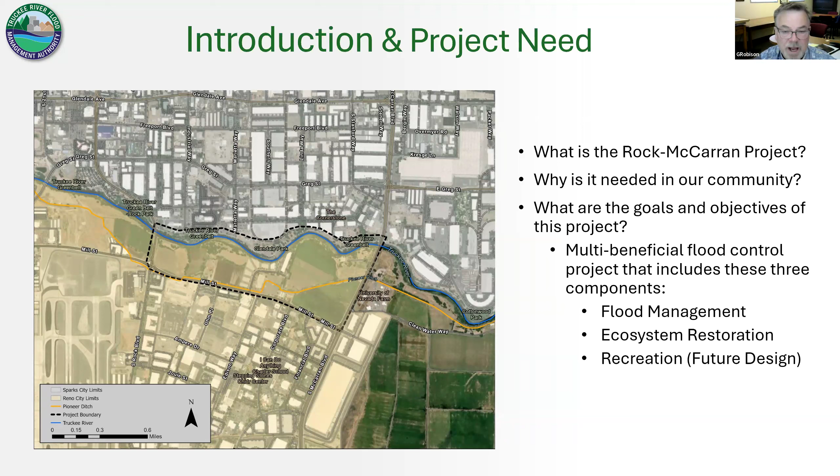So the goals of this project, along with the greater Truckee Meadows flood project, are flood management, ecosystem restoration, and recreation. In the case of the Rock-McCarran project, recreation is in a future design and it's actually being worked on right now. But today we're really going to focus on the flood management and ecosystem aspects of this project. Next slide, please.

So the benefits of the actual Rock-McCarran part of this project: there is a river realignment to put it in a more natural state. It is right now a very constrained, trained river. It has incised banks. You can see riprap in the picture in the foreground on the lower right side. So this is a very trained river. You want to let it have more ability to move around a bit in its meander belt.

We're also putting up levees on each side to protect these industrial areas and the airport. We're putting up terracing to create a more natural floodplain, low terraces and high terraces. And we're trying to increase flood storage and capacity near the river, but we're going to end the flood storage in the industrial areas. So water doesn't go into an industrial area, get all polluted, come back in the river and go down to our desert terminal lake, Pyramid Lake. So we're trying to do all these types of things in this project.

For the environmental restoration, by allowing the river to spread out more and managing the high velocities, we can reduce bank erosion, add secondary channels, which create more fish habitat, and construct pools and riffles that develop more diversity in fish habitat. And along the river, we reconnect the river to the floodplain, which affects the vegetative expression, wildlife habitat, and those sorts of things.

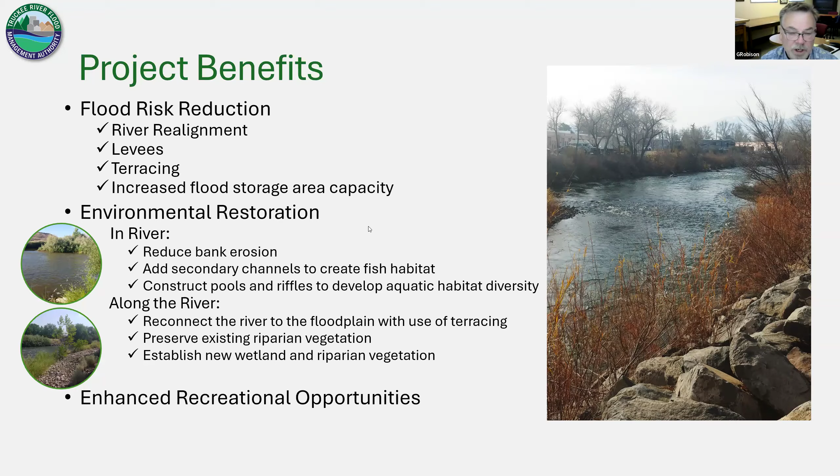He has a team working on this of roughly 35 people, geomorphologists, engineers, biologists, recreation experts, and planners, etc. So we'll take that from here and let him move with that. And you can just take it over from here, Shane. Great. Thanks, George, for that introduction.

We looked lightly at the recreation, although it's lagging a little bit behind because we're working on getting the flood first. The flood worked out first, and then the recreation will come. And then some additional considerations like costs and private property. So it really represents a significant amount of work with a lot of different teams, lots of different model runs on the hydraulic model, a lot of information that we pulled out of it.

And we presented 8 alternatives in the alternative study, and all of them were successful alternatives. And we ranked those, and then we got input from the TRFMA technical advisory committee, and we also had a public meeting. There were a few that scored the highest, but the recommendation was not one single alternative. The recommendation was take the best from a few of these alternatives and do another iteration. And so that's what we did here.

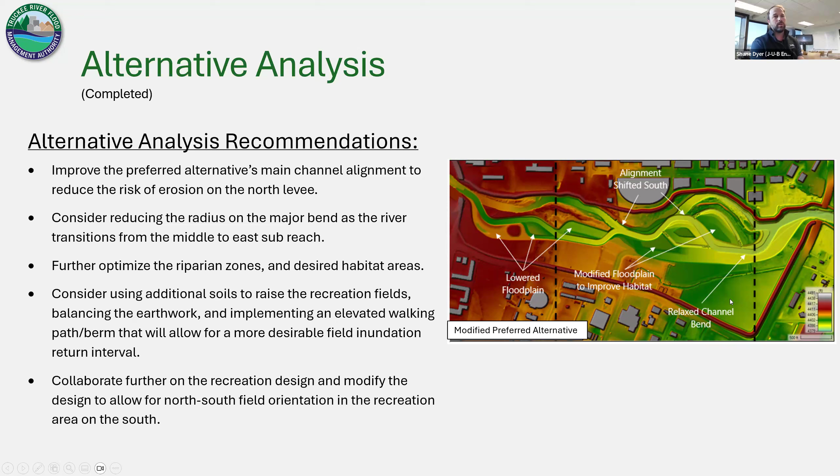And then we popped out with this alternative that we're going to go into really deeply today, right here. And so just to touch on what George talked about, why are we making the change? Well, the green here is what floods without the project, and the blue is what happens with the project. So that's a pretty telling slide, right? We're talking about billions of dollars of damage without the project.

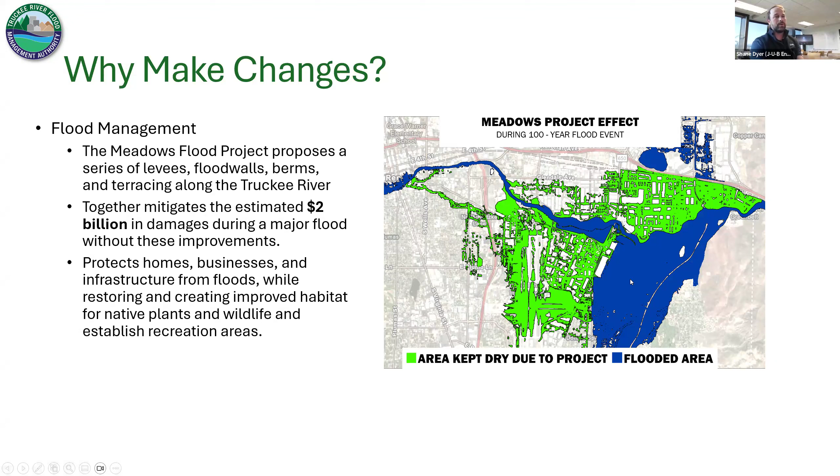So why are we moving the river? The current river configuration, the health of it is very poor. It's incised, it has all those man-made constraints, just like George was talking about. Here's an interesting historical image from the 30s, and you can see overbank flooding, connection of the river with the overbank and flood zone.

We overlaid some of it here to see what it looked like and what it looks like now. And from the very start of the flood project, there was a goal from the working group and the flood project community coalition that we were going to restore this natural system.

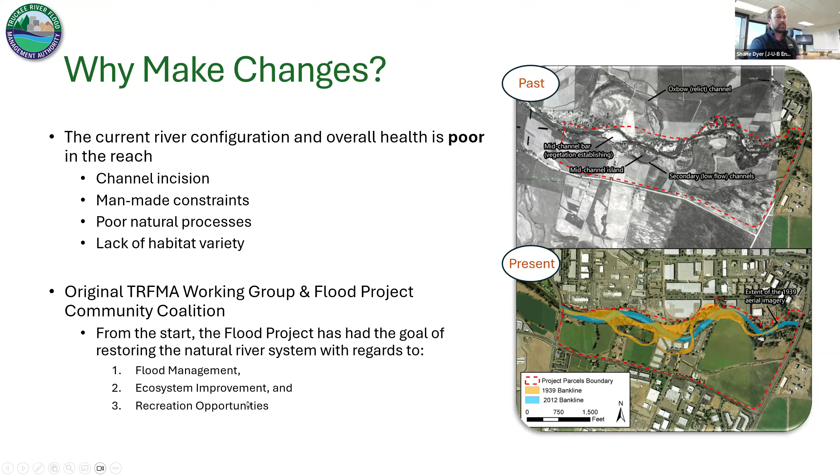And in order to restore the natural system, we have to look at the river holistically, really in regards to the flood management, the ecosystem, and then recreation opportunities. So just a couple of these things to kind of describe them.

So this is an incised channel, right? So when it floods, it's right in here. When it's flowing, there's no connection to the overbank. And this is the area we're talking about when we say overbank connection. And then the lack of habitat and biodiversity. We had extensive studies on the river that went through all the different riffle pools and runs and chutes, and there's a lack of habitat the way that it's been confined.

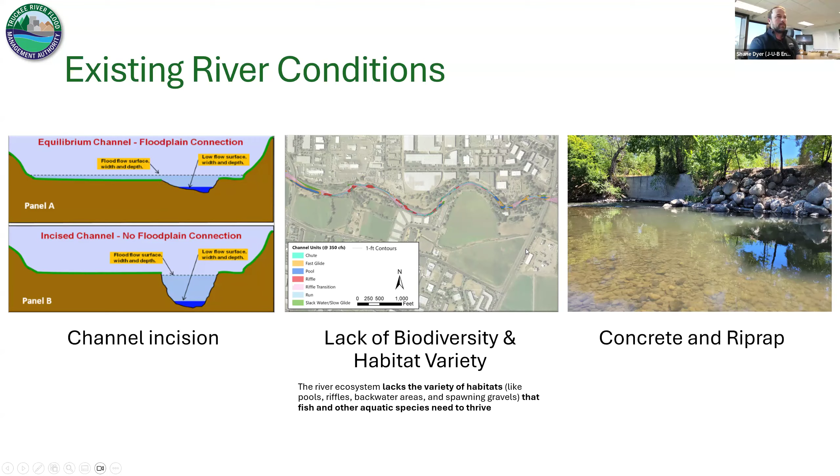And you can see here's a picture of the river in this section. You just have this random concrete wall and big rocks just confining the river, so there's no connection for the riparian zone or terracing. This is another slide that really puts it into perspective. Everything in red, pretty much every cut bank on the river, is artificially held in place by man-made elements. That's how it's being held in place, a very unnatural state.

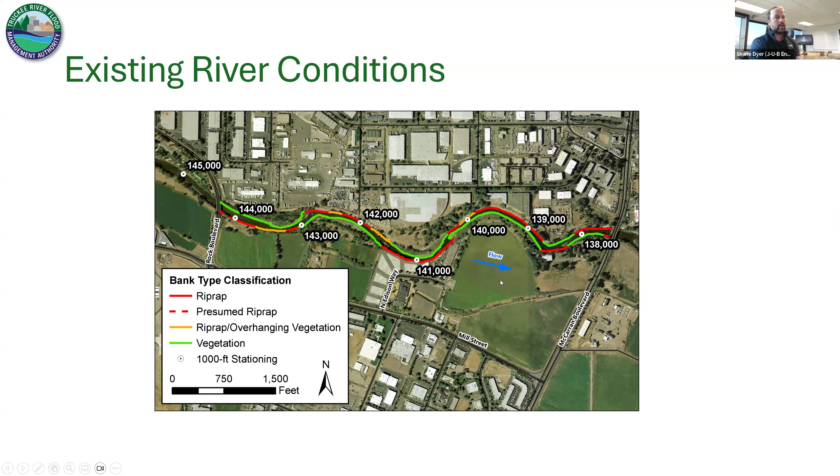Another big consideration that's been a challenge is the space constraints. So the existing river alignment, you can kind of see it there, and then the property line, and then you see the buildings right there too. And in order for us to have a FEMA compliant levee, it's wide, like 50 feet wide. And so right here, we can't actually fit one in unless we're doing a flood wall.

And one of the directives is also, let's avoid flood walls at all costs, because it separates the community from the river. It puts the river behind a big wall. You can't get to it. And so space constraints have been really difficult, dealing with getting the levees out of the private property and out of the existing buildings.

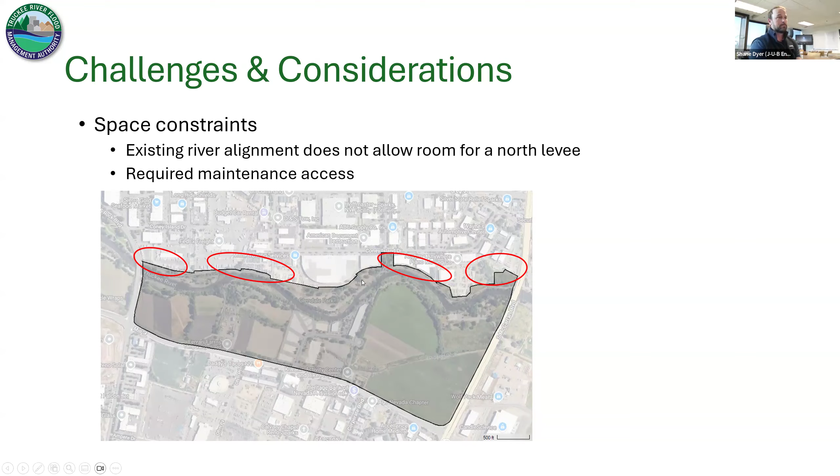We wanted to show there's a lot that we're taking into consideration as we look at engineering with the natural river process instead of engineering against the river process. Creating that meander belt width where the river can live inside and spread out that river flow, minimize the man-made treatments, preserve the cottonwood galleries, enhance the in-river shading, and use alternatives to riprap and concrete.

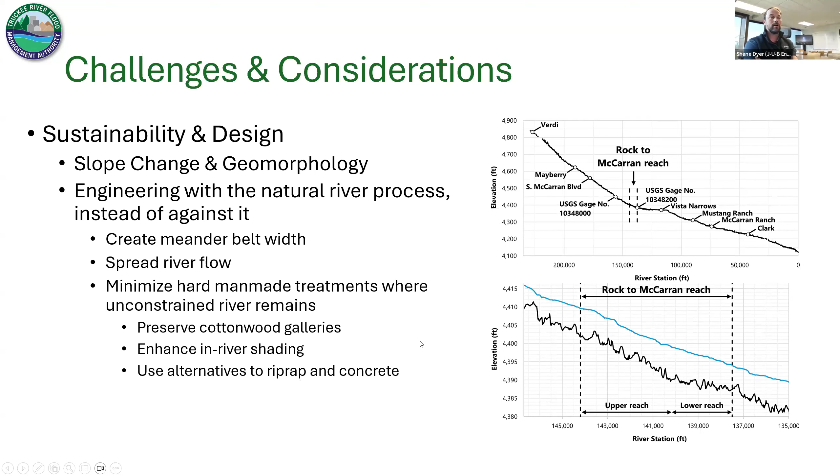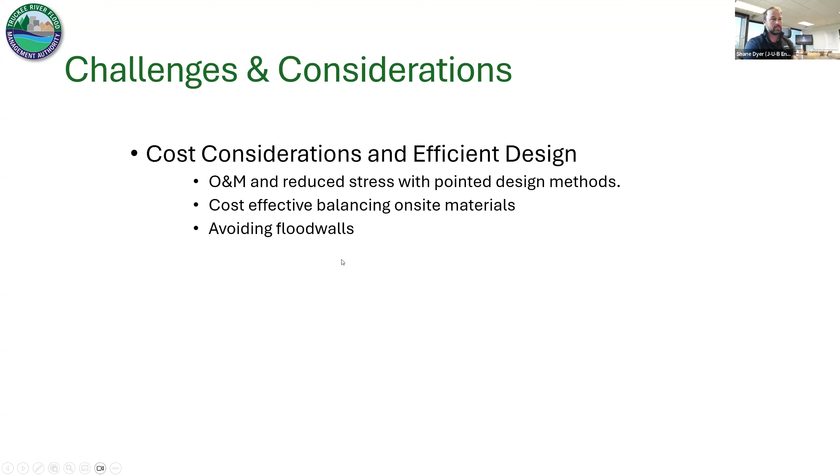One last consideration slide here, really that cost consideration and efficient design. We're really working hard on efficient design, and you'll see that as we go through the design here, working on how we are going to operate and maintain this thing, trying to reduce the potential maintenance costs with really pointed design methods, and then balancing on-site materials, avoiding flood walls, not just because they're very costly, but because they separate the community from the river.

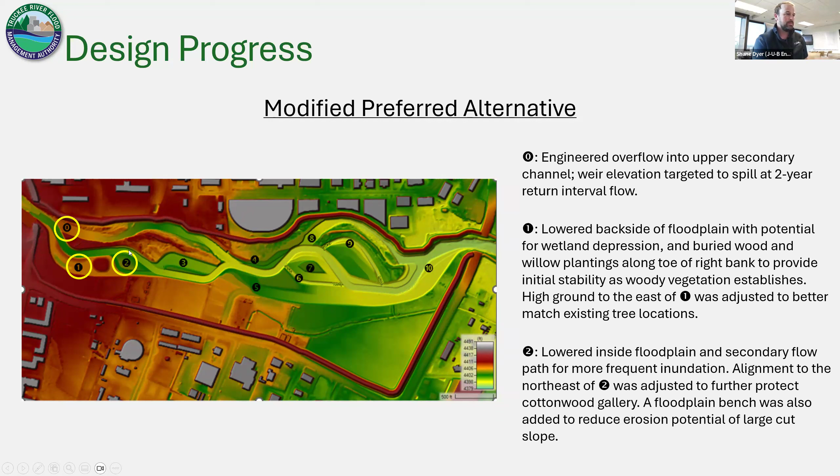And then let's see, we're using some large woody material over here. We're going to propose that for some mitigation measures over there. And then over here, we lowered the floodplain. We got another secondary flow path that is frequently inundated. And there's a little bench right here that we added. It's further protection on this cottonwood gallery so that we don't undercut as the river comes and makes that turn. So we added that bench right in there.

So this was a pond feature in most of the other alternatives, and we turned this into an actual through river feature, and it has kind of a dedicated channel over here that will be great for habitat, and it'll be shaded with the existing cottonwood gallery. And this will also promote a lot of growth in here as it will stay largely inundated.

We shifted this alignment, as I had indicated earlier. It came further up and posed a greater threat to this levee. So we shifted it down to be a little bit further away from that levee and make that work. We also shifted this terrace flow path over here to the side of the river. It was originally kind of right here, and there was a high avulsion potential. So we raised the ground right in here, and then we're taking the river out the side to reduce potential for avulsion.

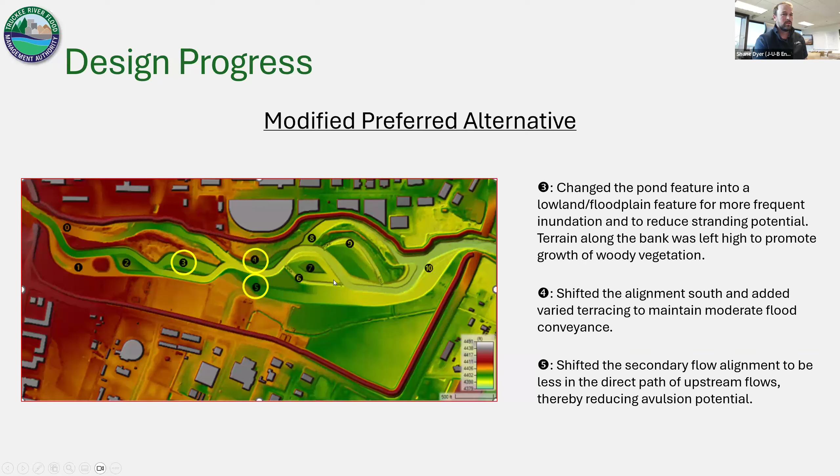So 6, we included a secondary channel after the bend and before the riffle, and we're going to have large woody material here to reduce the potential of losing the channel or channel capture and provide additional habitat. We raised this right in here to help us maintain the river alignment. And it'll also be great habitat right in there.

And then 8, we've got an engineered overflow again, similar, where we're utilizing that existing river. And this is kind of some of that efficient design. Like we've got these backwater channels on the existing river. We're using the existing river as it'll still be flow path. It'll still be overbank flow. And this is scheduled to activate around the 2-year interval currently in the design.

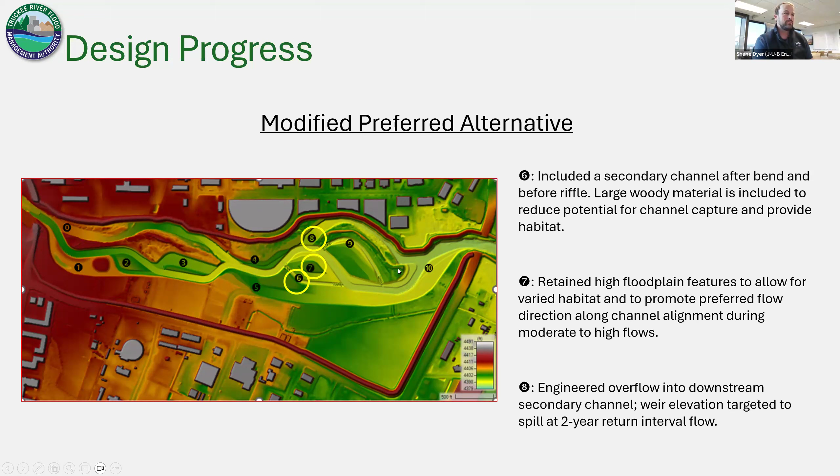So 9, this was another secondary channel overflow. We are again using some large woody material. And this is all habitat. That's when we were talking about a lot of that habitat improvement. We've got a lot of habitat improvement through the middle of the river. And then 10, we smoothed this out and really improved the way that the water is moving into and through the bridge by trying to get it turned sooner.

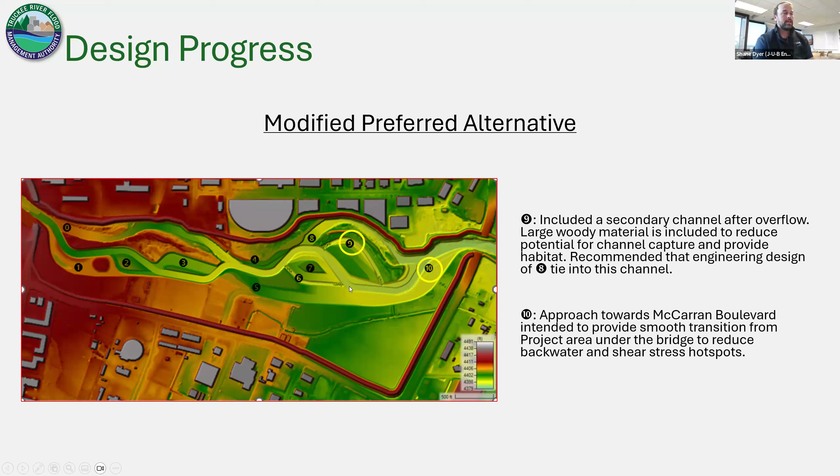So again, this is the conceptual iteration after all the optimization from all the alternatives. So we're going to run through how they inundate, and this gets really interesting and fun to look at. We're going to look at the whole smattering of the return intervals, and then the conceptual design of the hydraulic berm and some of the things that we did with some of the materials there.

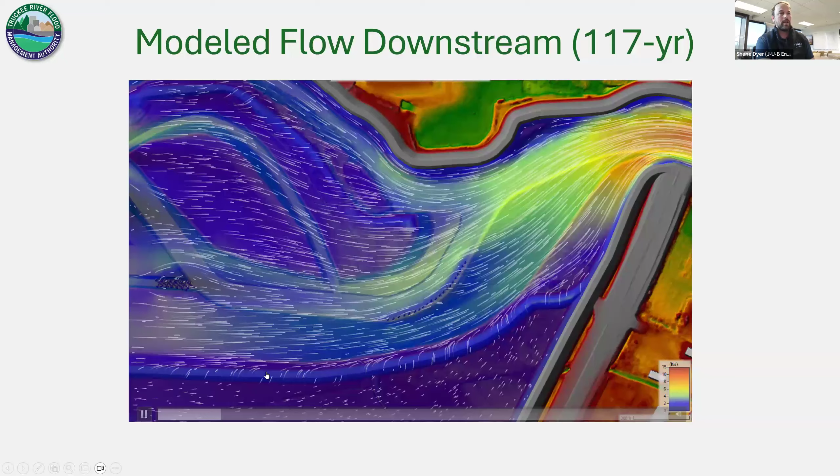Where might riprap be required, or some kind of man-made revetment that will protect against erosion? And for the most part, not a lot required during this 117 year. And that takes a lot of iterations to figure out and to make work.

All right, I'm going to walk you through some cross sections that help to visualize what's going on. So starting up here on the north, this is that north levee over here. And then we come down into this secondary channel. This is essentially the existing Truckee River. And then this is the preservation of the existing cottonwood gallery here, main channel, the new river right in there.

And then terracing, this whole thing is terracing that will be overbank for riparian. And then this is that internal berm, just a small berm that protects. This is actually the notch area, so this is going through the notch where we're letting water in. So that protects up to the 75 year. Here's the storage area slash potential recreation area. Of course, we're using it as storage to cut the peak off the top of the storm. And then the south levee.

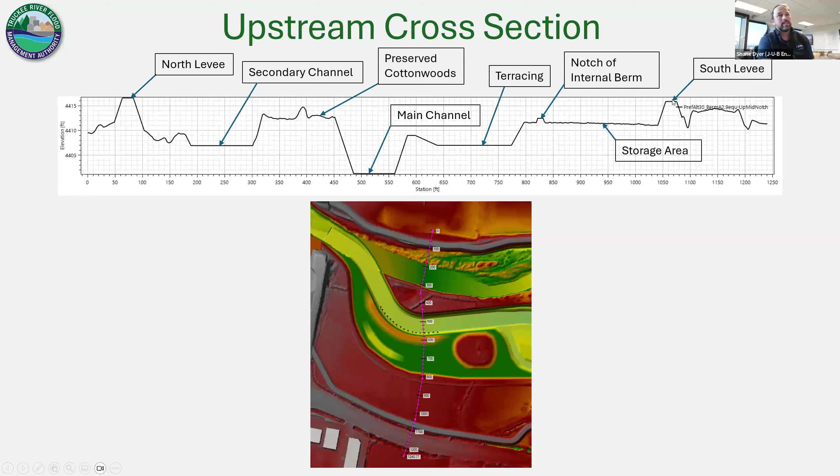And then here's one through the middle section. We've got the north levee here. This is that backwater channel slash existing Truckee River, preserved cottonwood galleries. And then we go into some terracing here. This is that channel, low flow channel, terracing. Then we've got the main channel here. This is the internal berm right there. And then recreation area and our storage area and south levee.

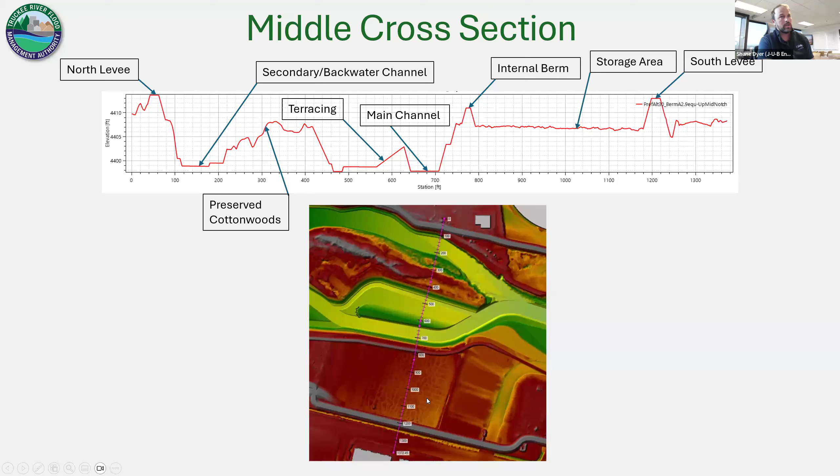And then one more at the bottom. So this one's a little more complex. You'll see the north levee, existing Truckee River, preserved cottonwood gallery, and then you've got that secondary backwater channel there, and then you've got some more terracing here, main channel here, more terracing, and then internal berm, and then storage area, and this is the deepest part of the levee here.

And you can actually see in this one, we did some grading, we added some soils. I think we have a slide on that. Yeah, right here. So we did some earthwork and site balancing as recommended in the alternatives analysis, where we used like a 20% waste factor on the excavated soils, assuming that we could only use so much in the project on the levees. And then we had an extra 83,000 cubic yards of extra material, and we put it into the recreation area and graded it in. You can see it a little better on this slide.

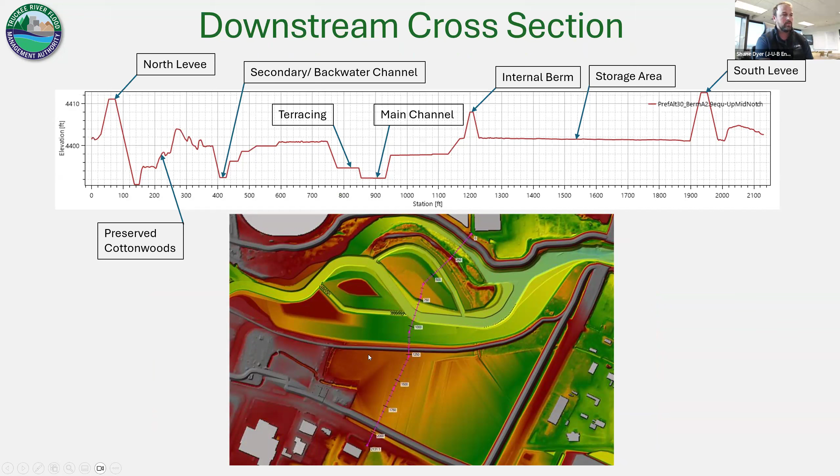The grading's rough right now, right? It's conceptual, but this is the concept. And we'll be able to work with these interior areas. Right now, it's kind of existing LIDAR, existing ground, but we'll be able to work with that and optimize those as well. We improved the drainage with this. We can improve the drainage with the interior changes.

The other thing just to point out here is we actually have been running it with this kind of worst case scenario access points. They're preliminary access points that we can change, and we probably will change, but we made these big bump outs so that we're going to make it better, not worse. And that way we can say, okay, the hydraulics are great. We even made it work with kind of a big bump out, and we did 2 of them for 2 access points for potential flow or whatever's going to happen. So that's kind of the placeholder right now in the design for access as we dial in the hydraulics moving forward.

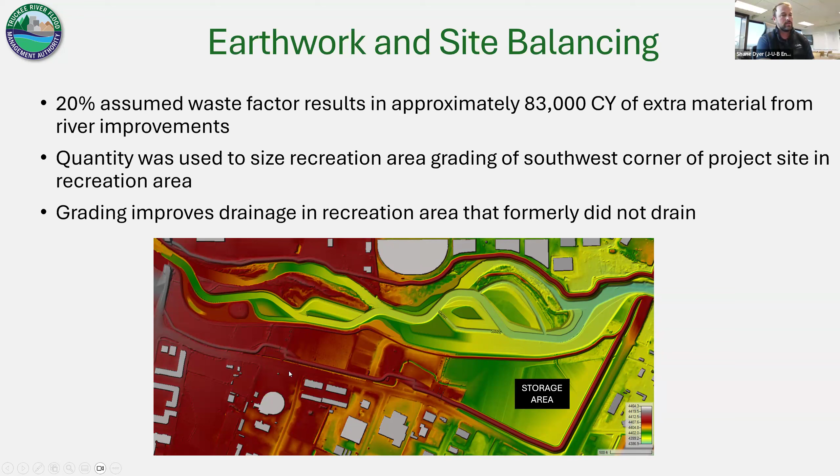All right, so alternatives, this is just kind of the summary. So the alternatives analysis is done. We completed it. And then the next step, we're starting the 30% design. And the first step is to take what was given in the alternatives analysis and get this preferred concept that we just walked through, and get some comments on it, get it in front of TRFMA, make sure it's right where we want it. We're probably going to dial it a little bit, right? From people's comments, we're going to dial it, and then we're taking it to the 30% design. And then after 30, we'll go 60, and then final construction.

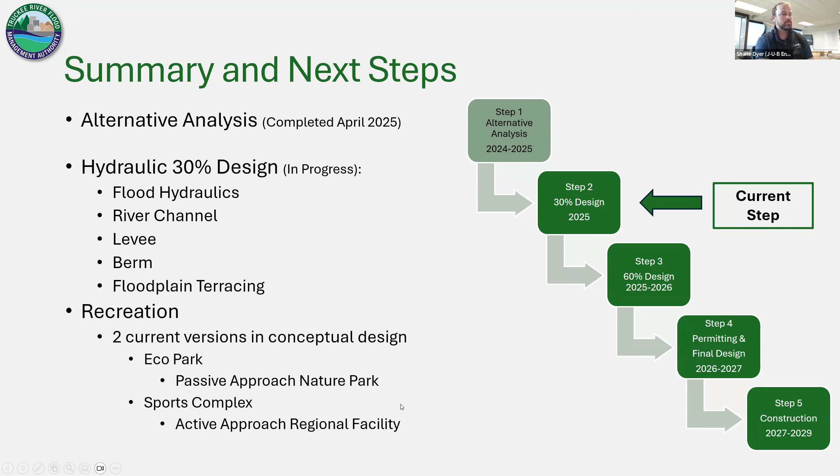I think George alluded to the fact that in the recreation right now, there's 2 conceptual designs that are going on. One's kind of like an eco park, passive approach nature park. We haven't named that yet. It's the passive one, small. And the other was like a sports complex, which is the active approach regional facility. That's like a big facility. And that's not really part of this current presentation, but there'll be more coming on that in the future as those conceptual designs come out and are presented to TRFMA.

That's it. I burned through that, huh? So now I think we take comments and questions.

Looks like we got a hand up by Eric Young. Go ahead, Eric. Thank you so much, Shane. That was so worthwhile. And just thanks for giving us the opportunity to see what you're up to. So many of us are curious, and it looks so incredibly comprehensively thought out, which of course is necessary. I'm really looking forward to whatever it ends up being.

But despite all of the important engineering work that you have to do and that has to be done right now, I'm really curious if Reno or the flood group has a requirement for public art in this facility, and if there's going to be any kind of a public art component conceptualized at some point for what's happening here. But thanks for all your work. This is just so professional, and I know it's going to be really well done, and I'm looking forward to it. So thank you.